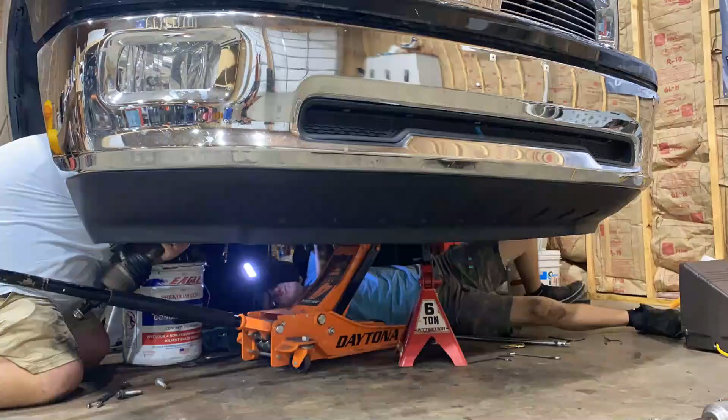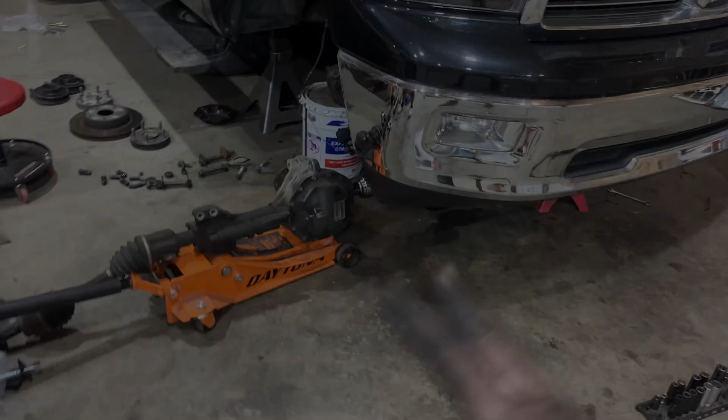Alright guys, the main issue I had dropping this differential wasn't these 3 bolts right here. They were super easy to get to. It was these 2 top ones. If you're watching this, the best way to get to it is from the front.

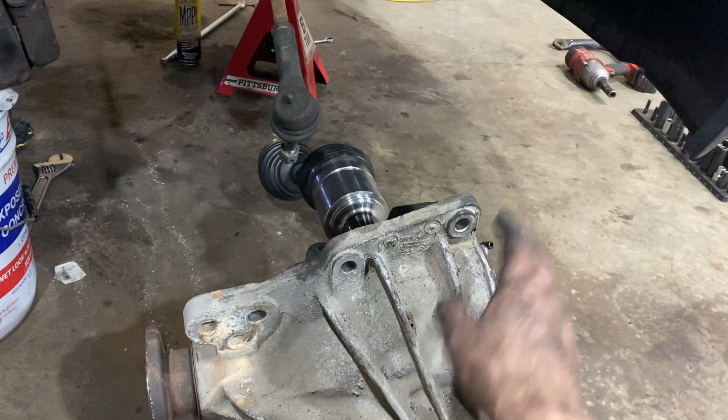For this front one, use a ratcheting 18mm open-end wrench. Coming from the front, get that one, then lay down back here behind it. You can break it loose with a large breaker bar and a short 18mm socket.

I went ahead and took out these 2 bolts and these 3 bolts so the differential actually lowered down, which gave me more room up here in the front. It helped taking this one out first, because then you could jack it up and it would rotate up, getting this fin further away from this.

But now that the differential is out, we're going to go ahead and install the 3 differential drop brackets. This is going to go like that and bolt onto there. This is going to bolt back into the factory location.

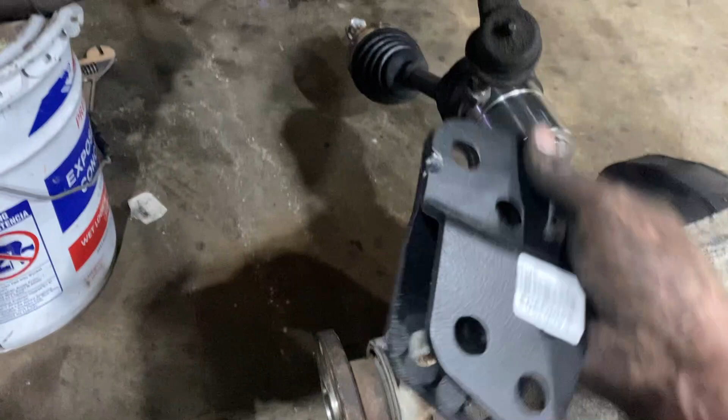Same with this right here. I thought they were going to make us cut these fins, but it's directional obviously. So that's going to go back up in here.

So we're going to bolt this bracket to those factory holes using the factory bolts, I would assume. Then this bracket right here is going to go just like that. That's just the differential drop bracket, because you do not want to fool with those factory locations again with this big differential under there - it's going to make it so hard.

I would recommend putting these brackets up in there first and tightening them down completely, so it's almost as if the frame got dropped down. If a hole doesn't line up, you can use the jack to jack it up. As long as you can get 1 or 2 of the bolts in, you can jack it into position and tighten everything down after.

So that's what I'm going to do right now, go ahead and install these differential drop brackets. My hands are completely black.

Once I get these installed and the differential is back in there completely and ready to go, literally guys, just drop down cross members, spindles, lower control arms, upper control arms, slap the struts in, tighten all this up, and we are ready to go off to get an alignment.

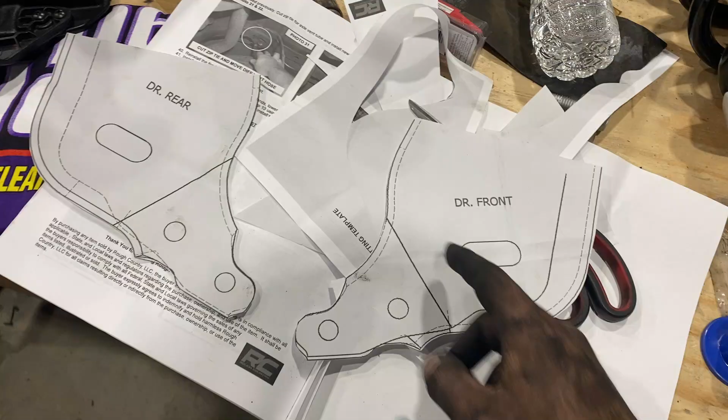So right here is where the lower control arm bolts go through. You just align all of this, mark this line. This is all on the driver's side, so you don't have to cut anything on the passenger side.

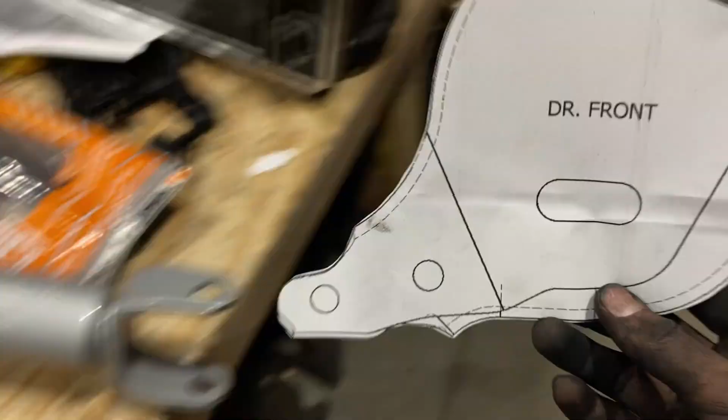This is for the back side of the frame, this is for the front side of the frame. You just line it up to that, mark that line right there, and then you're just going to cut that off, because whenever that differential drops down, it's going to hit that.

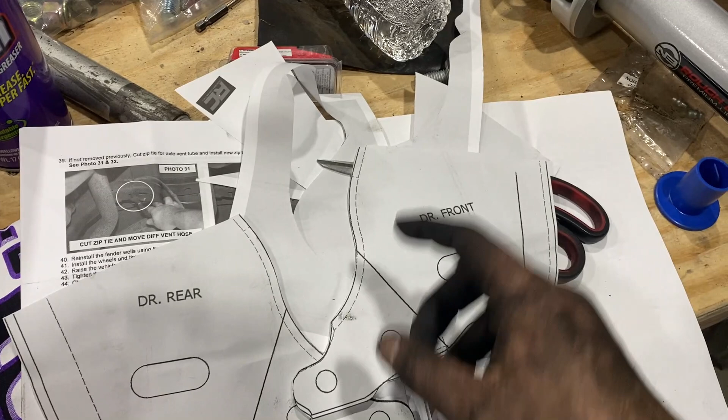So whenever that gets cut off, and then you bolt in the new drop down cross members, it has enough room inside of these right here. You see how that's cut out right there? That is for the differential whenever it drops down.

So now I'm going to cut that just with a saw. You just mark it up and cut it. I'm going to put the time lapse back on, and I will see you all whenever this thing is almost back together.

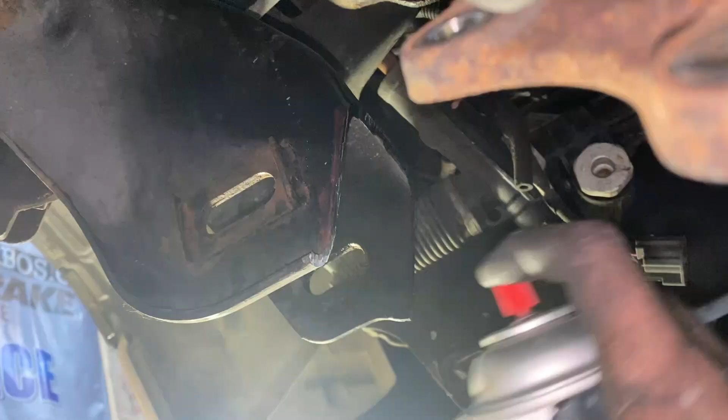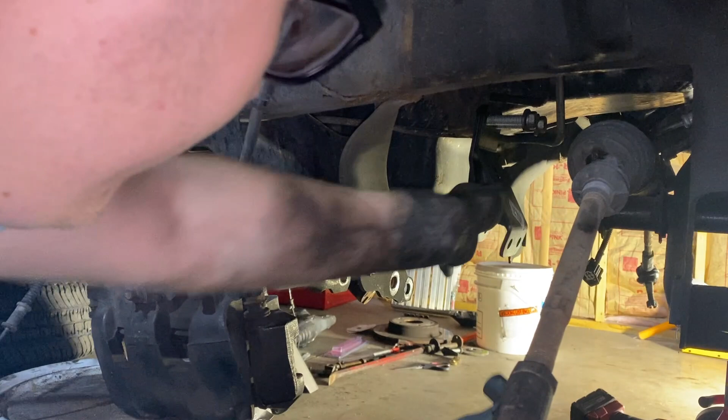Alright guys, now we are going to go ahead and put this differential drop bracket in right here. It just reuses factory hardware. It's going to mount right like that, and then your differential is going to mount into there.

Okay, so now that's on there. Obviously, we'll torque that to spec before we put the differential actually back in there. So we're going to go ahead and jump on over to the other side and put the other differential drop bracket in - you don't even have to get back here and hold it.

Okay, obviously we'll torque those to spec, just using this to speed up the process. Now we're going to go in the middle, which is right here, and install the next differential drop bracket.

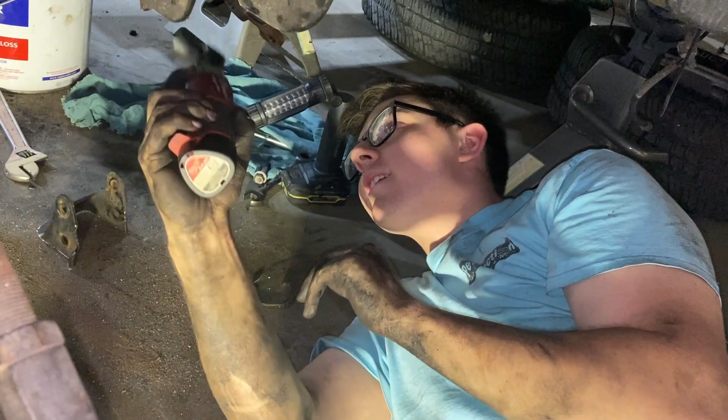We're going to go ahead and install this other differential drop bracket now. Are you videoing? Yeah.

Sorry, he's still in training. He's still in training, you know, becoming a mean filmographer.

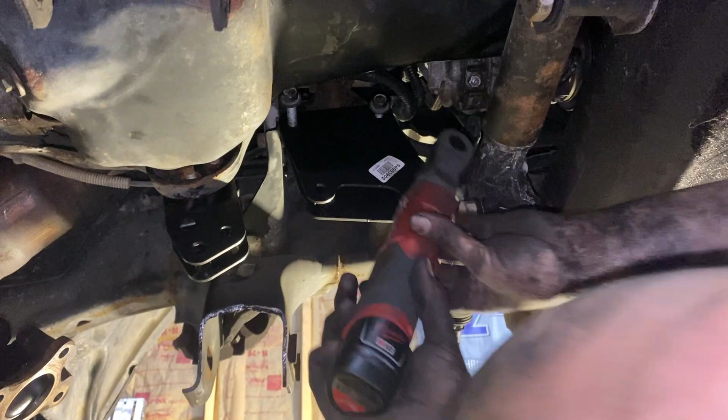Our big fancy ratchet - will our big fancy ratchet fit in there yet? Oh God, yeah. God, yeah.

We're kicking it old school until she fits, if you know what I mean. She's pretty tight up in there. I was hoping that it'd be more loosey-goosey, maybe throw a hot dog down a hallway style. But there wasn't much clearance in here.

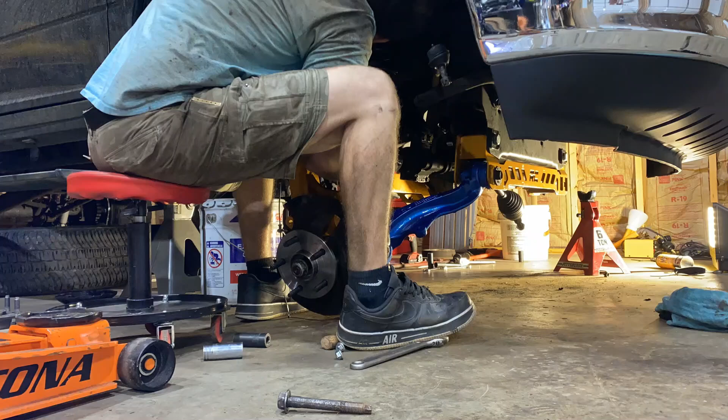Alright guys, so the truck is done. I just now pulled it out, and when I say done, I mean 99% done.

Where's the rain coming from? It's literally... oh, okay, there's one cloud above me. But anyway, I don't even care.

So the truck is done. Emery's gonna come get it today. And when I say done, 99% done, the only thing that we lack is the sway bar end links in the front.

Everything else is completely done. The sway bar itself has holes in it, and around the holes and on the end of it, they're completely rusted. And the new Rough Country sway bar end links use a bushing with like a C-clamp.

Is this dog seriously gonna bark the whole time that I'm talking?

Okay, but anyway, the way that the new sway bars work, he's gonna have to get a new sway bar itself. And he needs the truck back, so he's wanting to go ahead and come get the truck just without sway bars, so no big deal. He's gonna throw those on. It's literally just 2 bolts to put those on once he gets the new sway bar.

So I'm gonna go ahead and walk around the truck, maybe put together like a little edit and show you guys.